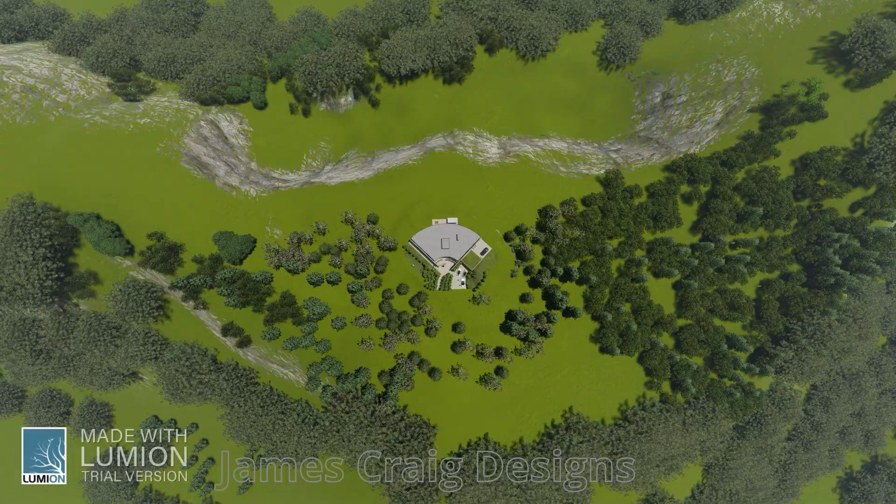I'd like to show you a house I designed a few years ago, and just recently I put it into a new piece of software.

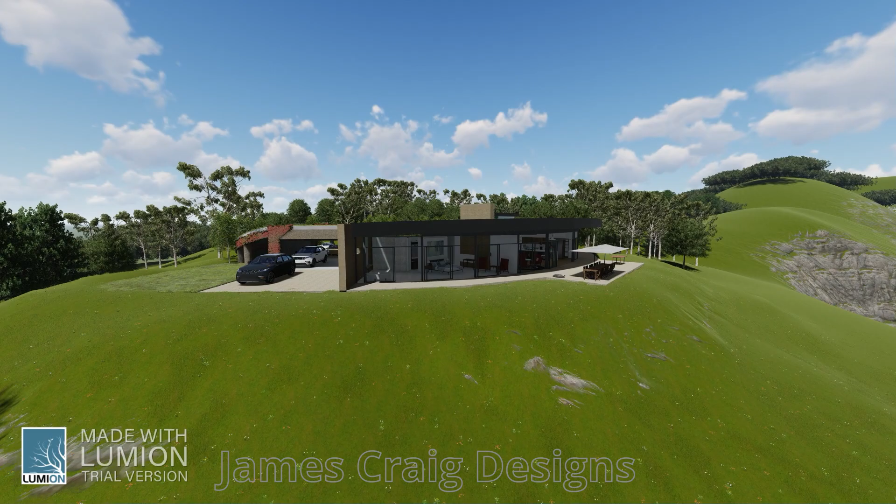You might think, oh yeah, it's a curvy looking house. Perhaps that curve, the front veranda, is designed to take in all of the views. Sitting high on top of a cliff, that is absolutely true, and it does take in all of those views to different rooms in the house. But that's not why I designed it.

I designed it as an exercise to look at how I could keep the summer light out and the winter light in.

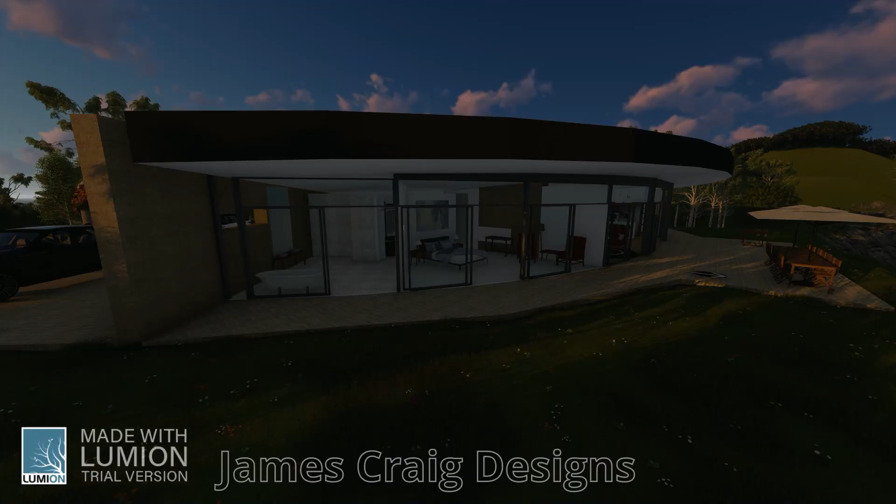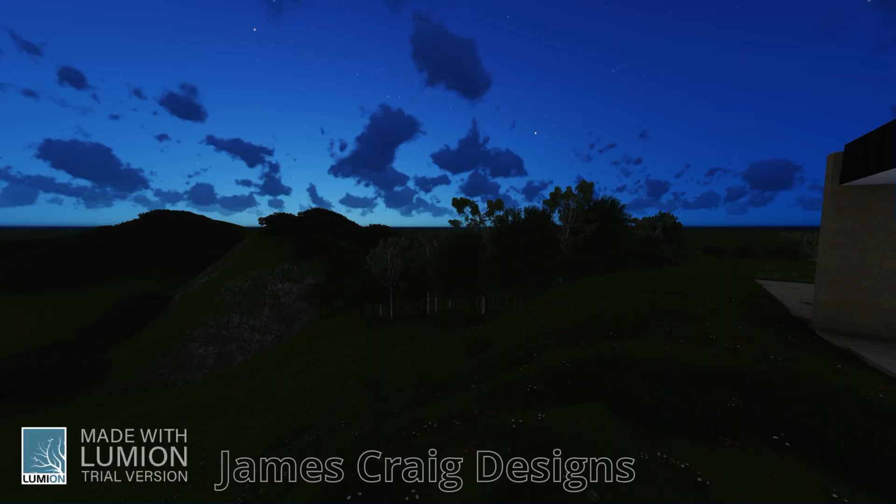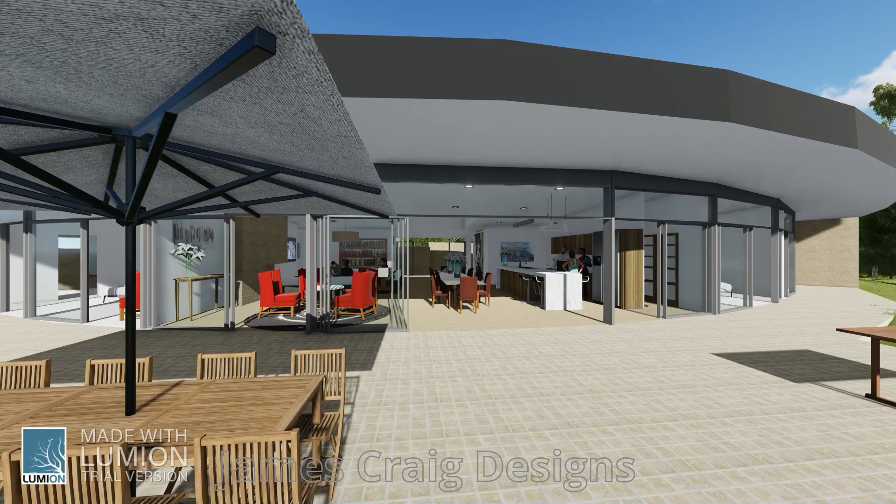When we look at it from beginning of day to end of day, this is the middle of January, you can see the sun doesn't penetrate beyond the base of the windows there, because of the angle of the roof. In winter, however, the sun is very low and it penetrates all the way through the house. The master bedroom there, bathed in light. The main living hub bathed in light all the way to the end of the day. And you can see those bedrooms capturing the last rays of the sun as it goes down.

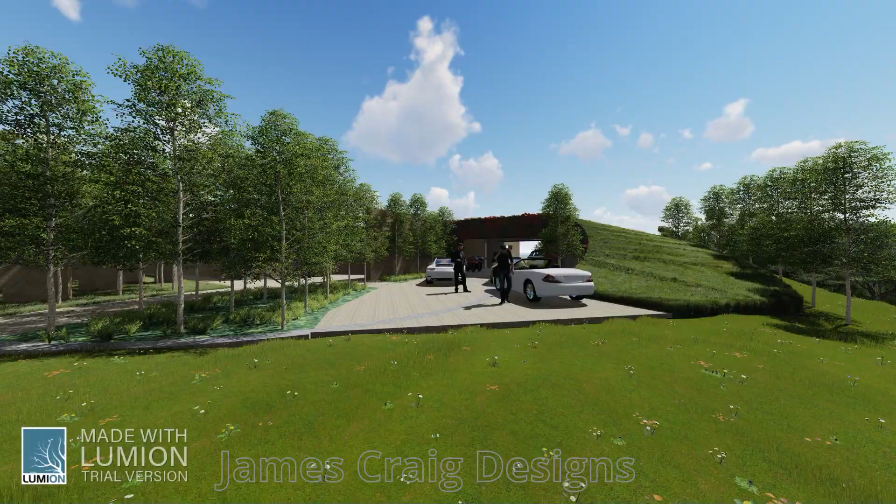I wanted a design that didn't really stand out. I just wanted a reasonably regular sized house. I wanted it to blend in with the landscape as much as possible.

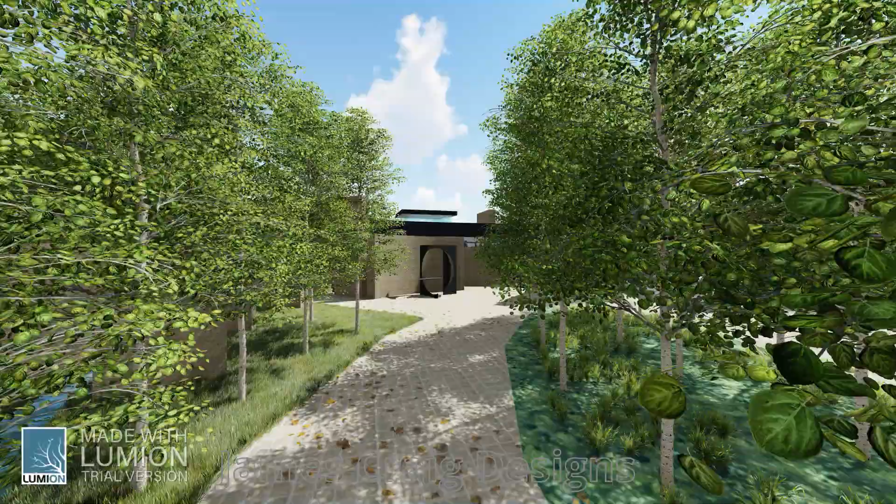I did want to feature some big tall rammed earth walls, which I love, a combination of straight walls and these curved walls in front of the house.

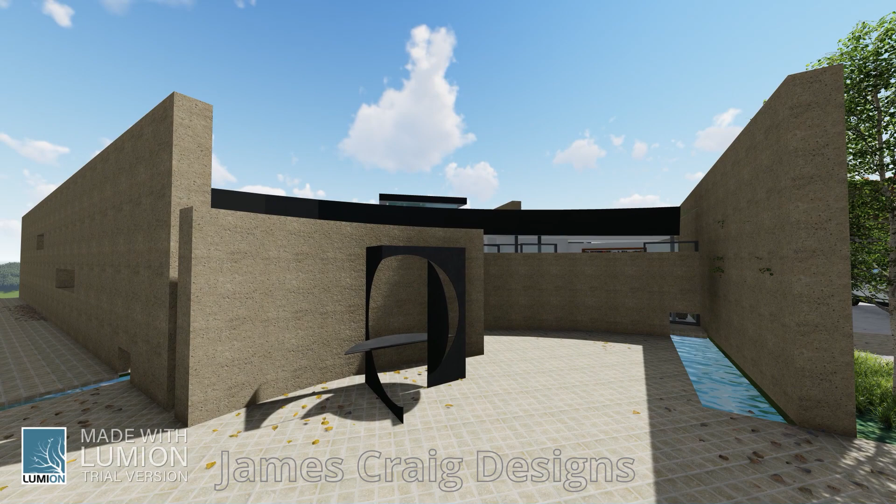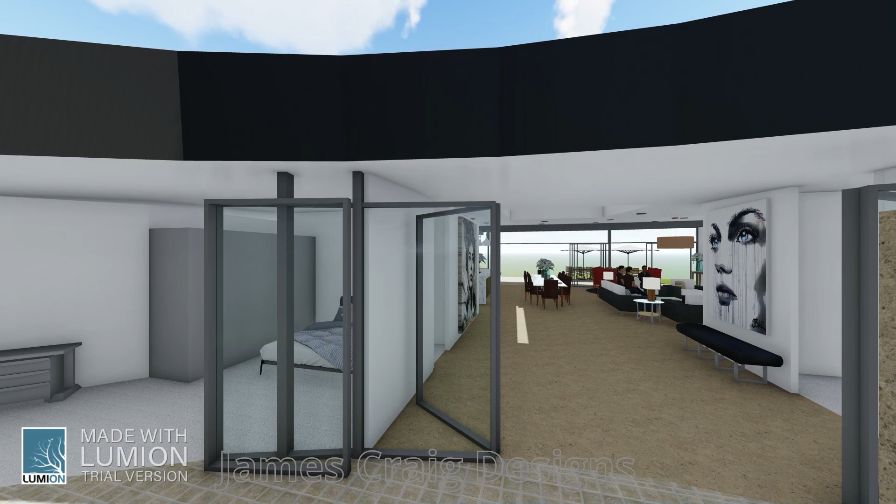What I wanted to do is, as you approach the house, I wanted you to not be distracted by what's going on inside. I really wanted the focus of attention to be outside. As you come around this corner, it's a bit of a journey coming into the house. You see little glimpses of water features and where they disappear off into the background there, and then you come upon a really wide entranceway.

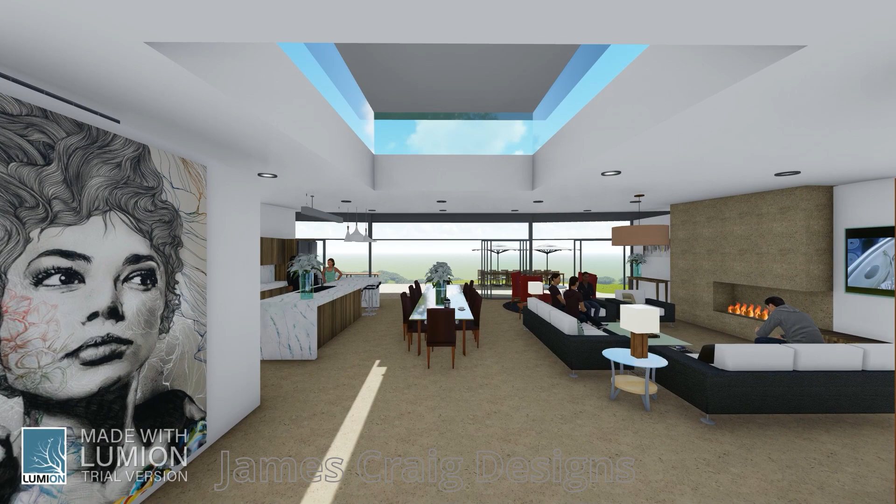This is a gallery entrance. You come through the gallery, some spectacular pieces of art. The first thing you see is this amazing floating roof held up by structural glass and some clever engineering there.

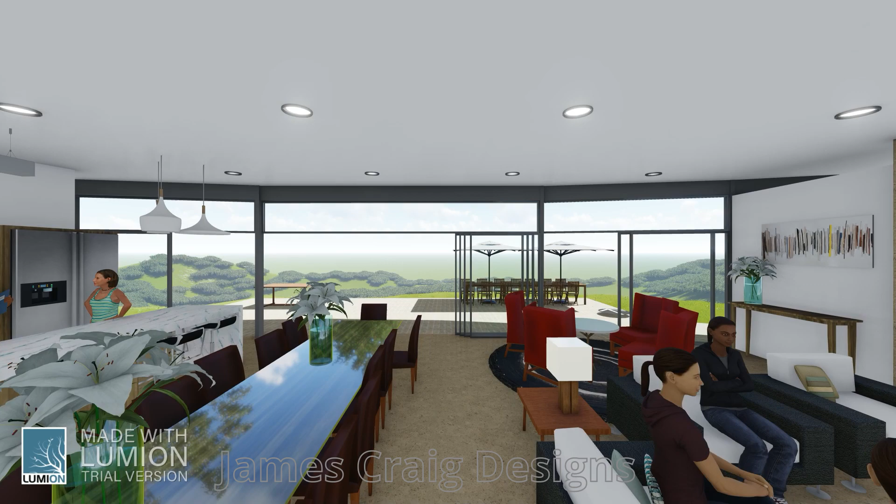You move through the space, and the space is your dining table and your kitchen and your lounge, and you're drawn to the landscape, you're drawn to the vista that this room points to.

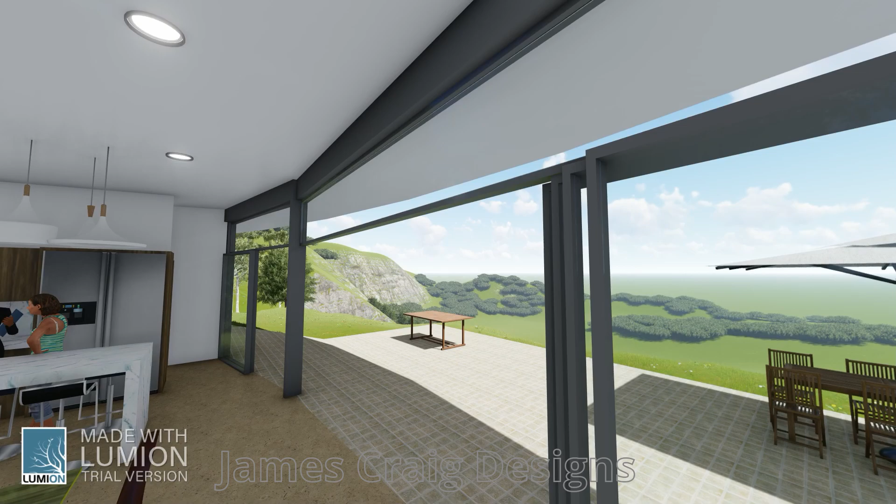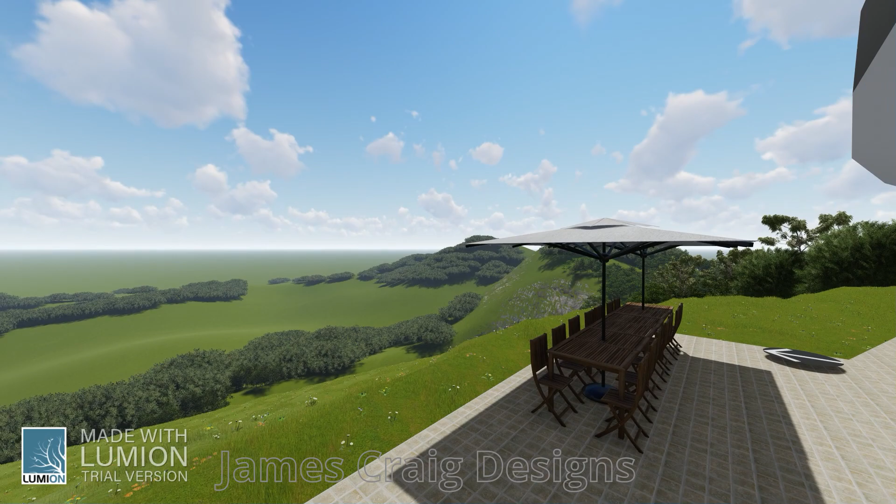You can see there we're in the middle of summer and there's no sunlight penetrating into the house. The views from left to right are amazing, and this design obviously is going to work really well if this house is perched up in a high location.

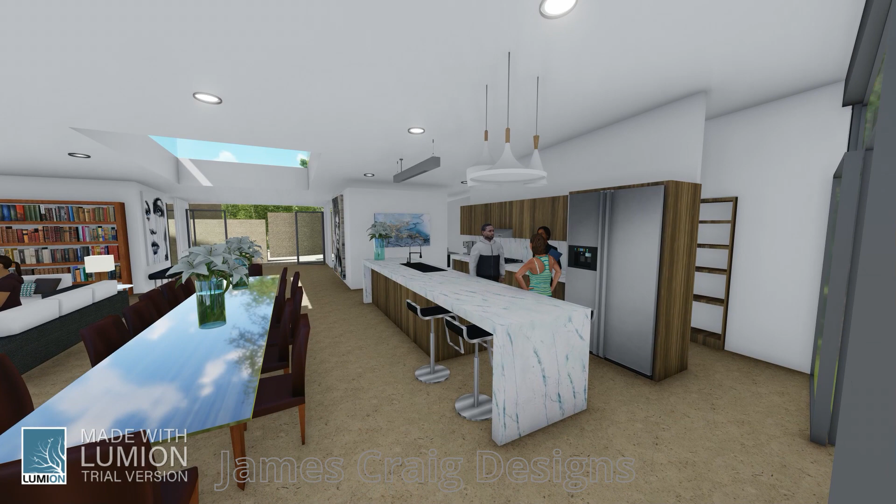The inside, polished floors. This is a limestone mix.

And of course, like every other house, it's divided up into its various compartments. On the right hand side here we have a master bedroom, a walk-through wardrobe, ensuite, a parents' retreat, a laundry, a central toilet.

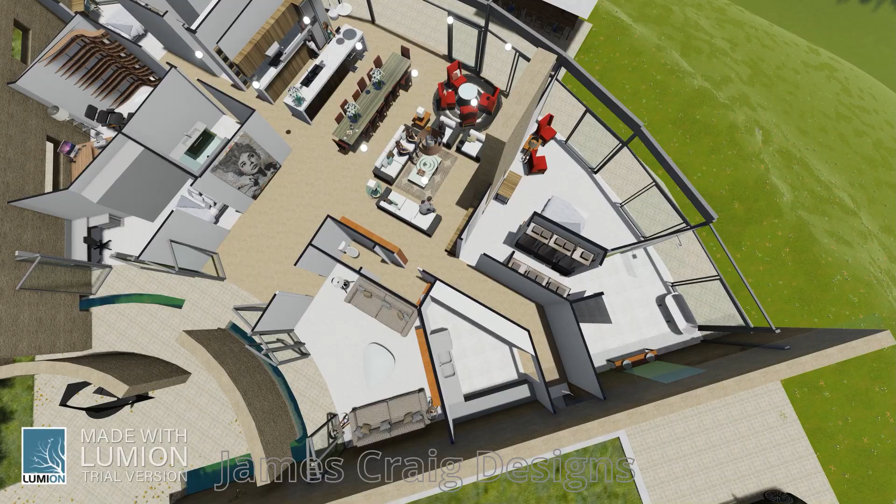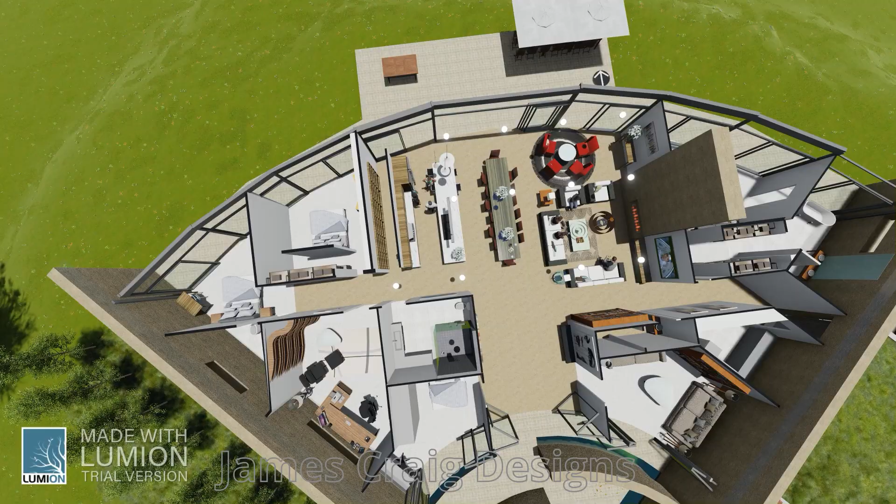In the middle of the house is the central living hub, the lounge, the dining, the kitchen. There's a butler's pantry, and on the western side, bedrooms 2, 3, 4, and an office, with a central bathroom there, and an ensuite for one of those bedrooms.

What I really wanted to do is feature these big walls, and I wanted to separate the house from them and have this pane of glass that connects the house to the wall. You get this beautiful stream of light coming through, and it grazes up the wall, showing off the textures.

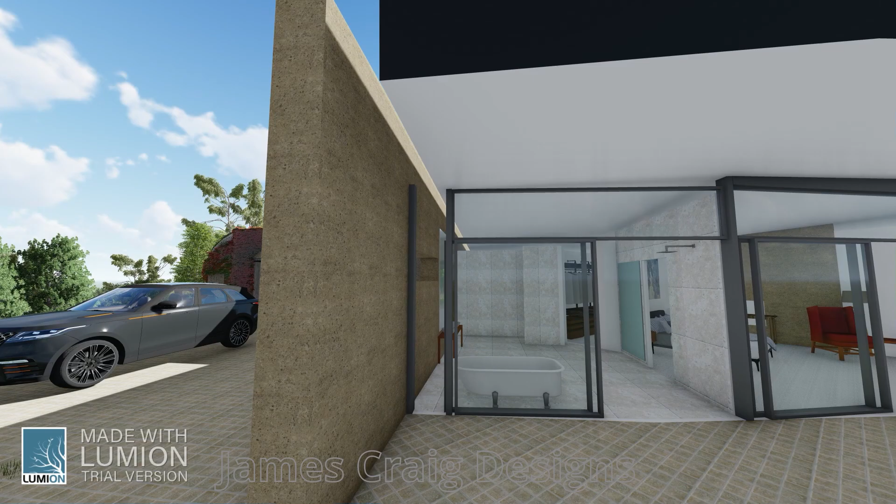In winter, you can see the sun path coming through here, this floating ceiling in the middle. You can see where that light comes through and penetrates into the house there.

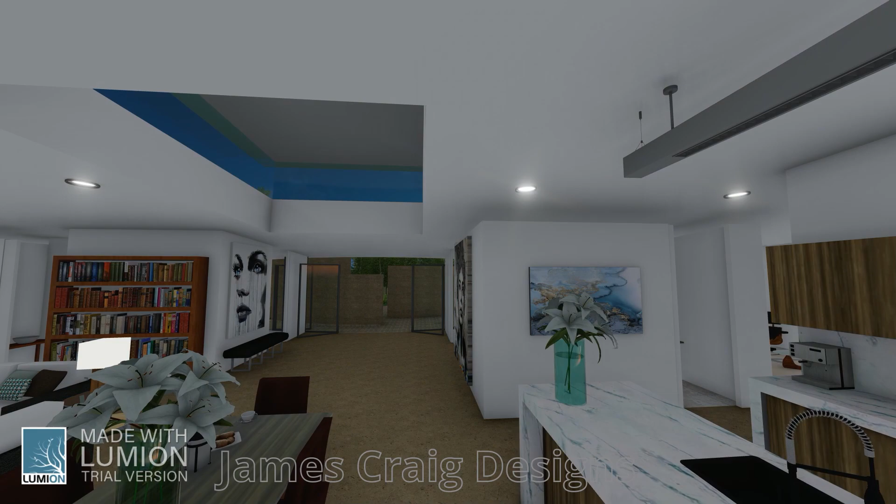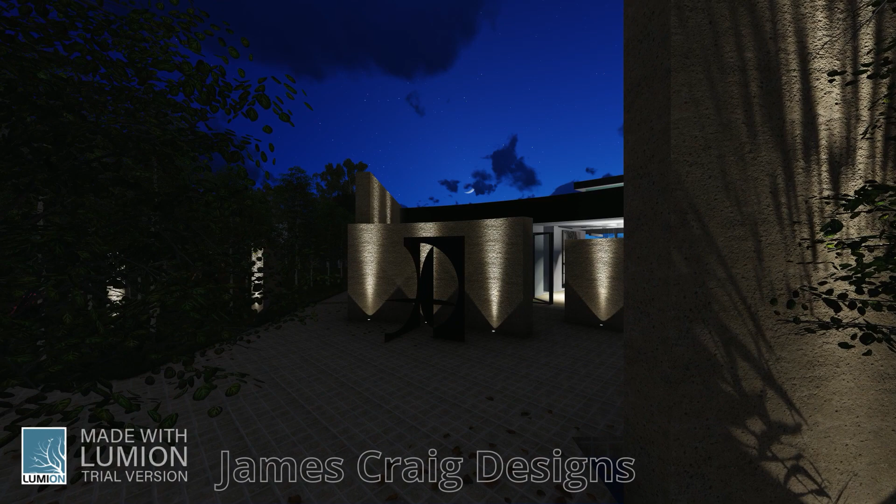There's some landscape features out to the left here where I've got a sculpture garden, I've got some water running through. But I didn't want to make a feature of that, because with the rammed earth walls, beautiful colour, beautiful textures, what I really wanted to do is focus on highlighting just the stonework, the size, the height of the walls, the impact of these curved walls.

On the right hand side there'll be glistening light effects from the water. The sculpture, famous sculpture on the left here, silhouetted by the walls. There's no point highlighting a black sculpture if that won't work.

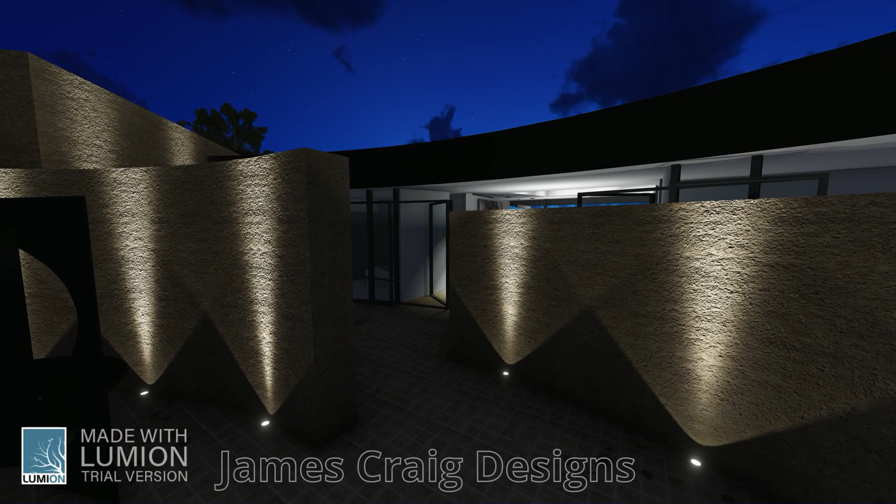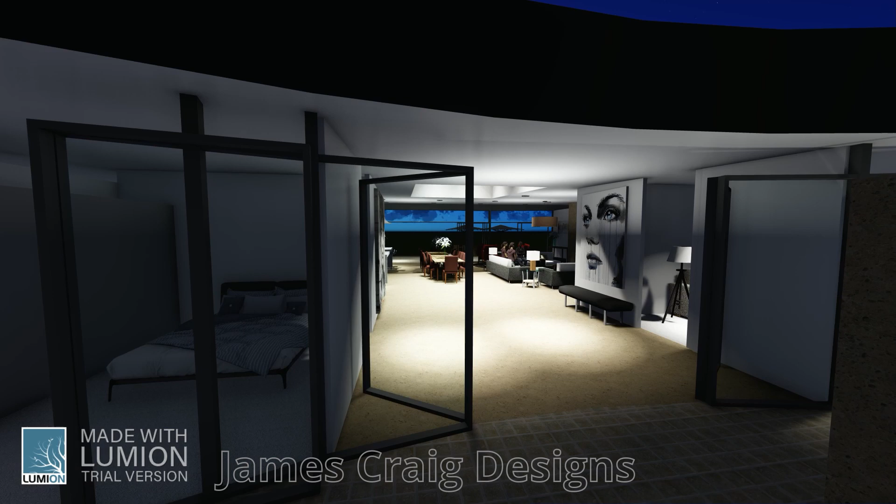And then you get little glimpses of the gallery as you make your way through the space. You come in and there's more lighting of these walls, and eventually you come to the front door and you're drawn into the space. The first thing that you see here is the gallery entrance, featuring some really large pieces of artwork.

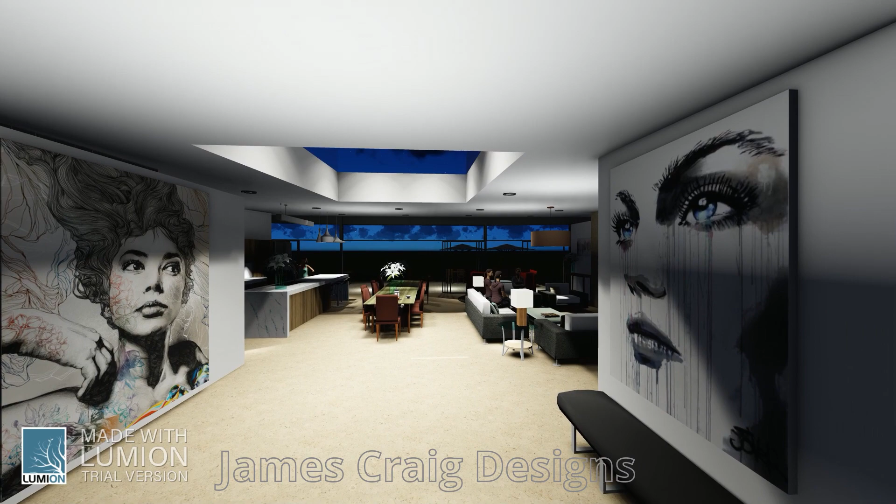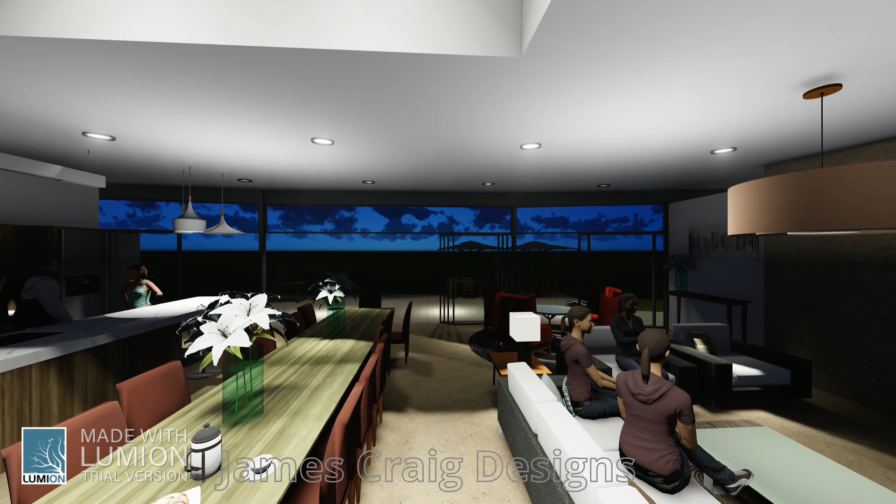Your bedroom on the left hand side there, parents' retreat on the right hand side. We make our way into the main living hub, the central living hub, and again that rammed earth feature, those earthy tones are brought in.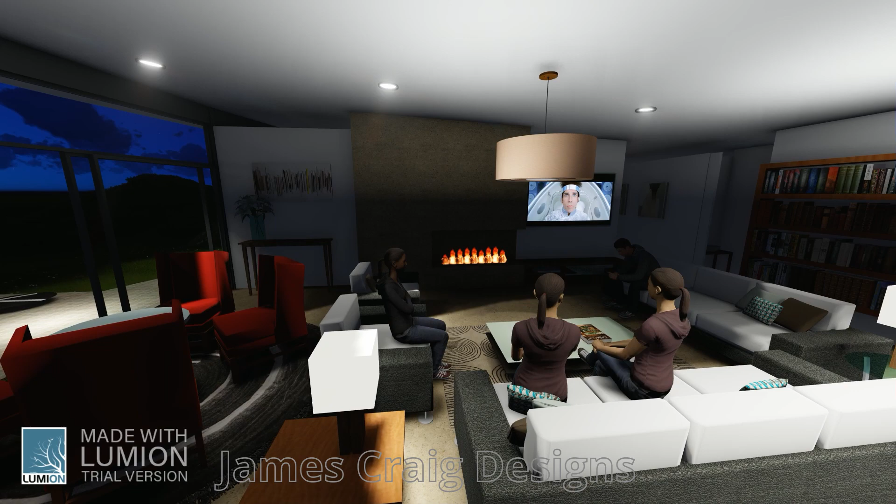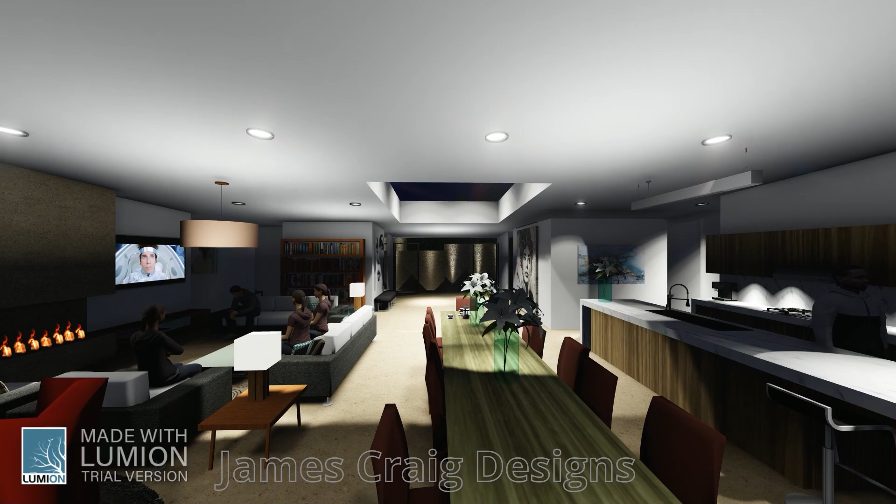That's where the fireplace is, a massive fireplace there. Instead of a fire, we've actually got ethanol burners burning there. You can see the TV in the background, and it makes a really warm, inviting space. Huge dining table for 14 people, massive kitchen there, and we come out to the spaces beyond into the landscape at night time.